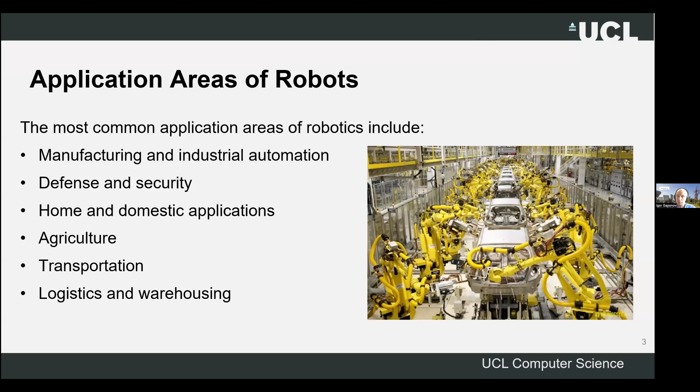Because industrial robots are such a huge and important player in everyday life, I just wanted to briefly show you the numbers. It's safe to say that by now there are almost 4 million units of robots installed worldwide. Just try to imagine how many engineers are required to service, repair, install, and reprogram them, say for every new part that robots need to be making.

Of course, the growth has been staggered somewhat by the recession in 2019, but then recovered quite quickly. In fact, since 2017, the number of units installed of industrial robots has been growing on average by 13%. This was further boosted by the pandemic, because people have seen a huge need and importance of unmanned technology - robots don't need to be quarantined, and they can still keep producing goods in the factory setting. Despite the slowdown in the economy in 2022, this did not actually affect robot installations.

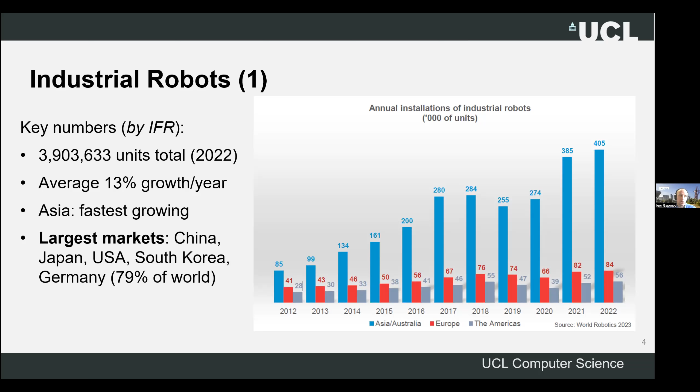And if anything, the demand is still higher than it was pre-COVID. And Asia is the fastest growing market in the world. But in fact, almost 80% of all industrial robots are installed across just 5 countries, which are China, Japan, USA, South Korea, and Germany. And most important applications of industrial robots include manufacturing of electrical and electronic parts, and of course, car assembly. So these two jointly share the lead in terms of applications.

But also robots are used in a variety of other applications, including food, and that includes both manufacturing and packaging. And it's fair to say that many things that we use in everyday life have been either manufactured or somehow assisted by robots to some extent. And sooner probably the percentage of these goods will increase.

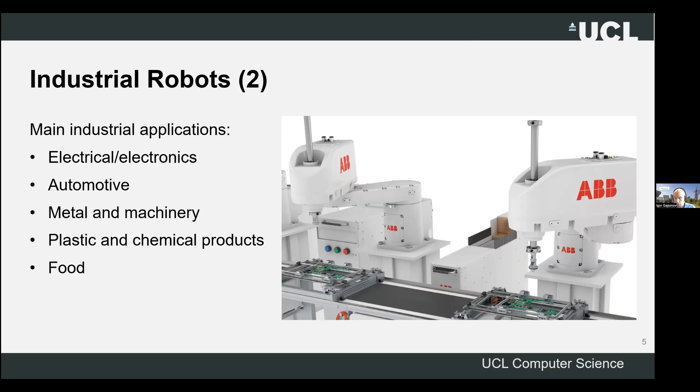But another fear that many people have is that because robots are used wider and wider, they will be displacing human workers, and that can obviously lead to various societal and economic crises. But in fact, studies show that that is not the case. The fact is that actually it's labor shortage that is apparent in many countries, and that's especially true for small and mid-sized enterprises. In the European Union alone, almost 3/4 of the companies report that they are short of skilled workers.

And that's where robots come in. Actually, many young people who enter the job market prefer to work in a company that uses what we can dub the technology of the future. And of course, robots and AI, artificial intelligence, are big players in that market. So the image of the company is very, very important.

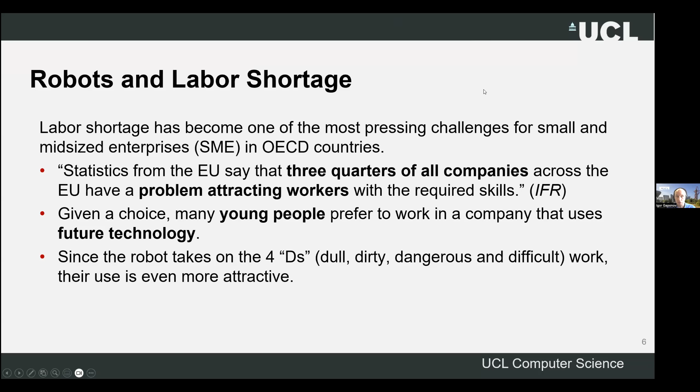Also, robots are most often used to perform one of those 4D works, such as dull, dirty, dangerous, and difficult. And of course, people who find themselves working alongside robots have more opportunities for professional development, for growth. And in fact, there is a bunch of evidence that automation does not lead to job substitution.

So we do not close workspaces for people. Instead, we reallocate people, and often people who were performing routine or dangerous tasks are now moved into the higher skilled labor sector, where, for example, they find themselves being complementary, being essential for the manufacturing process, because now they'll be programming robots. This is something that's commonplace in many factories, where workers who used to be just manual laborers in the past, or engineers for the automation line, now will be moved into servicing and programming robots.

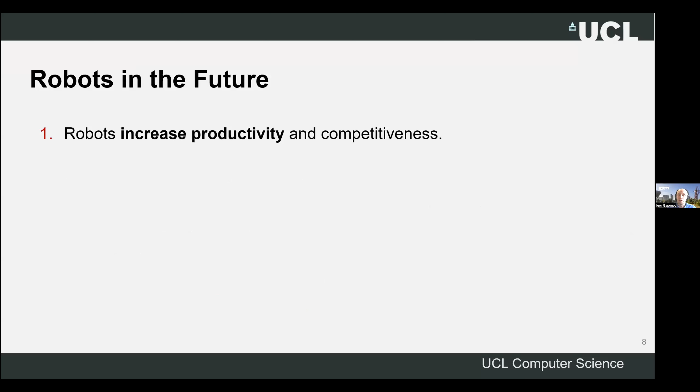This works because robots increase productivity, obviously, and the competitiveness of factories and firms, the companies that use them. That in turn leads to increased demand because now robots can produce more quality and probably cheaper goods. And that obviously creates new job opportunities because of the growing manufacturing output.

And now it's not just that robots are entering big industries and big factories. The future is robots and people working together. And that also includes small enterprises. For example, there are now several robots which are safe to be used around humans, called cobots. They can be installed, say, in a garage to help a small manufacturing facility, and in applications which were inaccessible for robots before. So there are actually many new use cases of robots which appear every day.

These lead to many governments and companies focusing on providing the right environment, the right skills to nurture the current and future workers. And of course, that has already led many governments and universities to create, sponsor, and try to develop these fertile environments for people to learn the skills in robotics and AI. That includes, of course, many universities such as UCL opening respective educational programs which focus on robotics and AI. And undoubtedly, this is one of the most promising areas of the future in engineering.

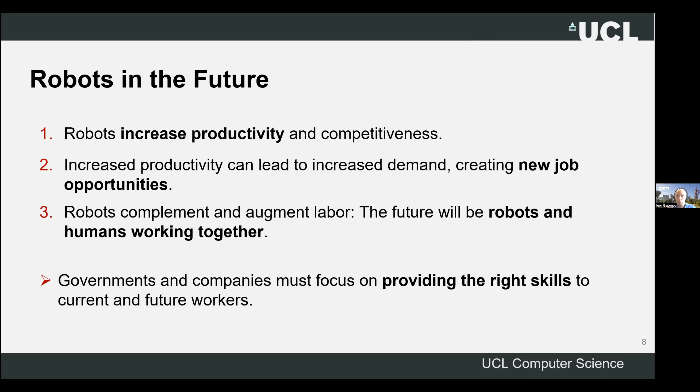And now that we've seen the impact of industrial robots, I would like to shift a little bit to probably a lesser known area of robots. These are called service robots. So essentially, this is everything that does not participate directly in the manufacturing process in the factory setting.

And there are many applications. So there are robots for transportation and logistics, including warehouses. And many of the robots in the transportation category include, for example, food and beverage delivery in restaurants. So if some of you have seen those, these fall into that category, transportation and logistics. Then there are many robots that are used in hospitality now.

For example, these are robots for mobile guidance, information, and telepresence, and they're used in a variety of public venues, including museums, airports, public fairs, exhibitions, and such.

Then there are many medical robots. For example, last year alone there were almost 5,000 surgery robots, very similar to the one you're seeing in the picture, sold worldwide.

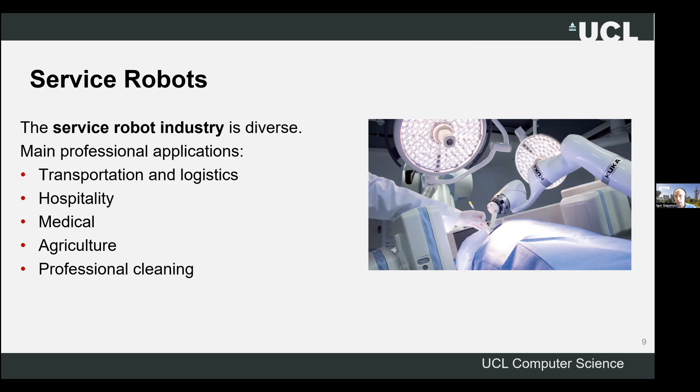Then agriculture robots, as I mentioned before, which include everything from growing and harvesting crops to milking robots, and robots for cleaning. Professional cleaning, especially floor cleaning, is a big category. This is very important due to the shortage of labor, and these robots work perfectly in areas with large floor space, like airports.

But also, there are many robots for consumer use. For example, over 5 million were sold last year alone, mainly domestic household robots such as vacuum cleaners, and some of you may have one at home.

But also gardening robots, for example robotic lawn mowers. There are more than 1 million devices sold last year alone, and these numbers are growing continuously. If anything, we will see an explosion of robots like this in the future.

And it's needless to say that for drones, an area of robotics that was used very sparingly 20 years ago, even 10 years ago, now they find themselves being used by many households worldwide. Many experts think that the next area that can explode is the exoskeleton area.

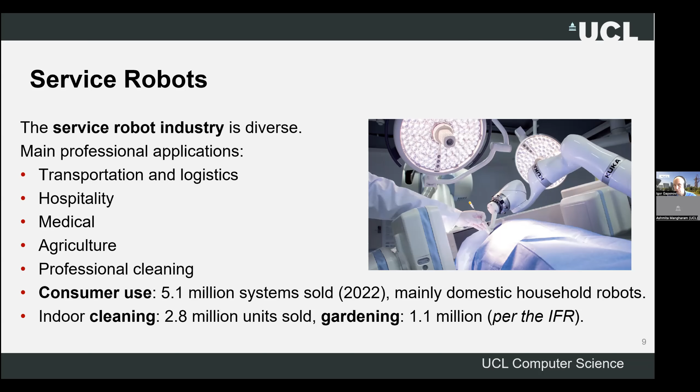For example, if laborers' work involves supporting a weight over their head, an exoskeleton can take or lift some of the load from them so they're not as fatigued as before. These robots are finding greater and greater use in many applications, including industrial and medical. I'm going to give a couple of examples of how they're used more extensively these days.

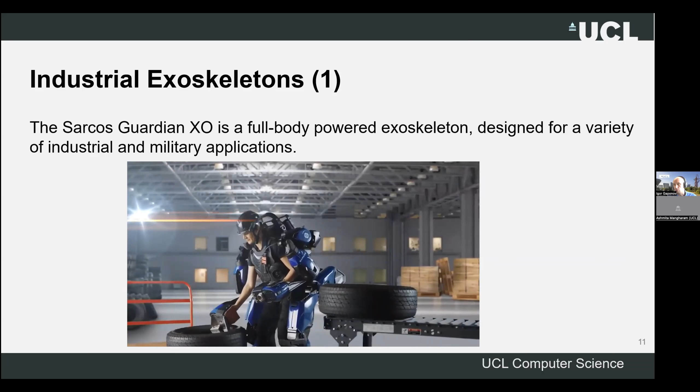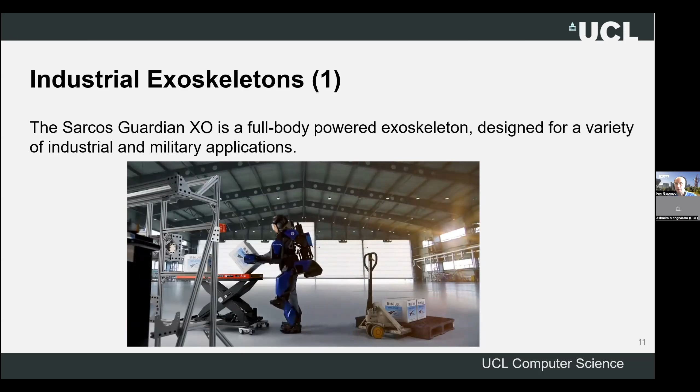The robot you've seen on the previous slide can be used to lift heavy loads. This is obviously useful in a variety of daily living and professional tasks, including helping warehouse workers, those involved in goods delivery such as loading or unloading trucks, groceries delivery to our doorsteps, and workers who lift bags at airports. Robots like this have been tested extensively over the past decade, and they're now permeating the consumer market.

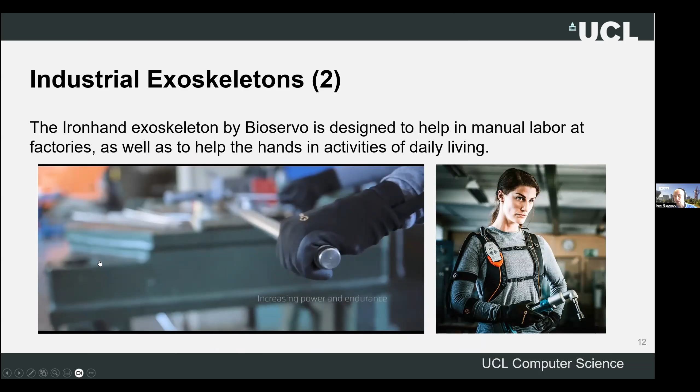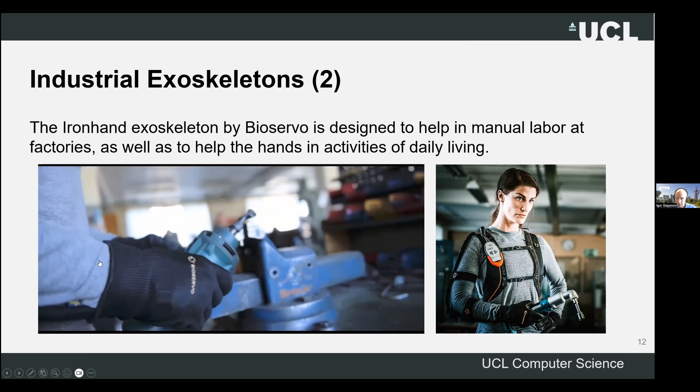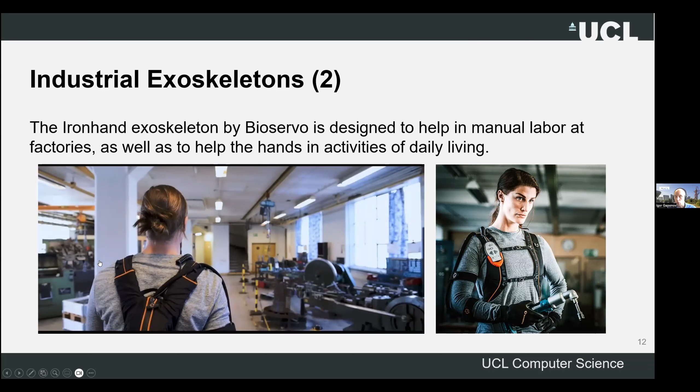Another type of industrial exoskeleton is wearable, soft systems which augment certain body functions. For example, there's a device called Ironhand, which helps manual laborers in tasks such as gripping, cutting, and holding, since this is obviously very tiring work. Using robots like this in industry not only helps boost productivity but also significantly decreases the risk of injury sustained by workers. Robots like this are finding wider and wider use in various industrial settings these days.

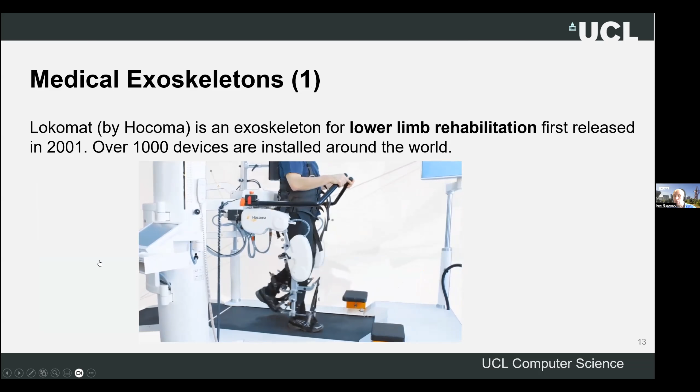But of course, apart from industry, there is a big demand for medical systems, because humans sustain injuries that may prevent them from performing activities of daily living. One common disease is stroke, and many people affected by stroke, depending on severity, find it very difficult to restore normal gait or walking. In traditional rehabilitation, it takes 2 or 3 nurses, as you've seen in the beginning of the video, to help people restore their functions, and simply we don't have enough nurses, doctors, and medical specialists for each patient.

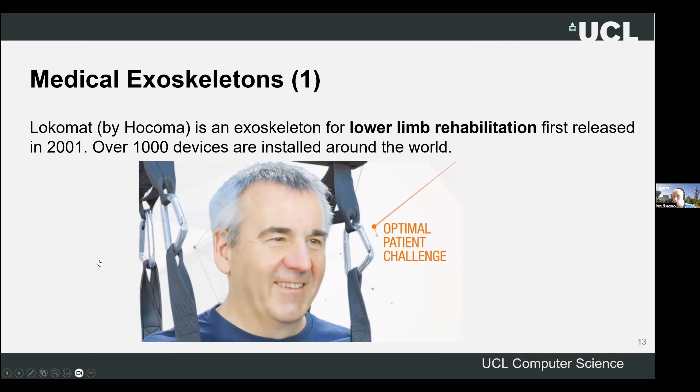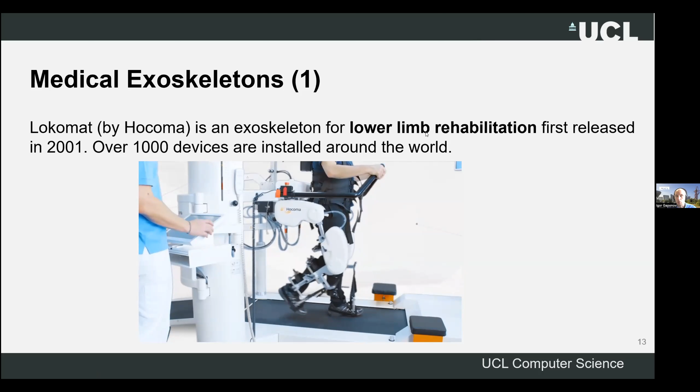So devices like the Lokomat here are becoming more and more common, and today there have been over 1,000 devices installed at various hospitals around the world. But of course, this device can only be used statically in a hospital. But what about those people who need a device like this at home? Indeed, there are many advances in this area as well.

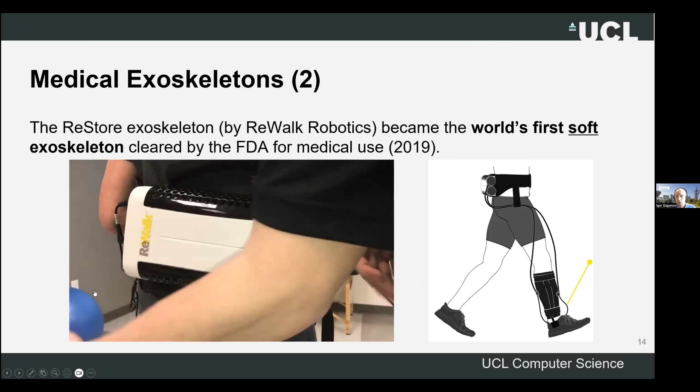For example, the ReStore exoskeleton by ReWalk Robotics was the first soft exoskeleton, which does not feature any rigid links around the human body, to be licensed by the FDA, the Food and Drug Administration, in 2019 for medical use. As you can see, the system is quite compact, and essentially what it does is help the lower limb, when affected by stroke, during walking.

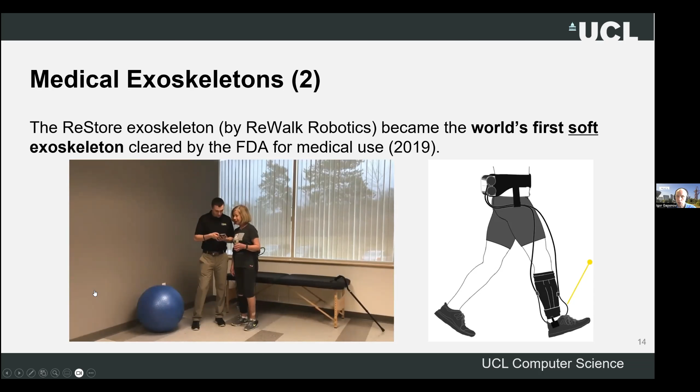Instead of using this for rehabilitation only in the hospital setting, you can wear this device either underneath or on top of your clothing. And this device can help you walk, which is again a very big advance in technology, and is extremely useful for many people out there.

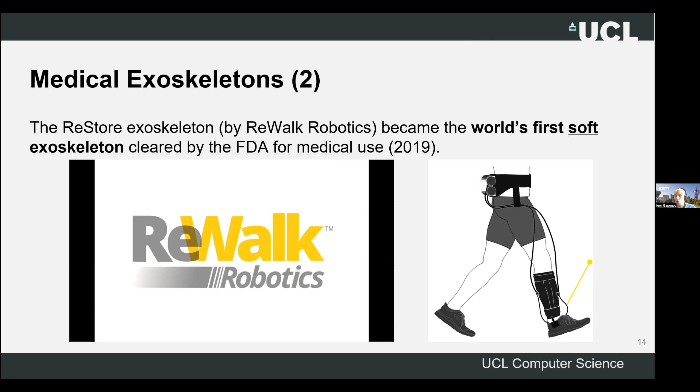So these two robots are for rehabilitation and assistance, but sometimes there is no rehabilitation that can help people. For example, spinal cord injury is a very severe injury. It can be sustained by those who, say, get into a car accident. And in this case, if you have an injury to your spinal cord, you cannot restore the functioning of your legs. And you end up in need of a certain device which will help you navigate and go out there in the environment.

Very commonly, this is a wheelchair. But again, there are many disadvantages to using a wheelchair, including accessibility. Too many places, unfortunately, are still inaccessible to wheelchair users. And that is why, instead of a wheelchair, there is an opportunity to use a medical exoskeleton.

For example, this is the device called ReWalk, by the same company as you've seen on the previous slide. It was licensed for in-hospital use over a decade ago, but also it can be used by persons at home. So you can acquire this as a commercial device and wear it to navigate either within or outside your house.

And also, which is very important, it supports both sitting down and standing up movement, something that many disabled people have difficulties with, of course.

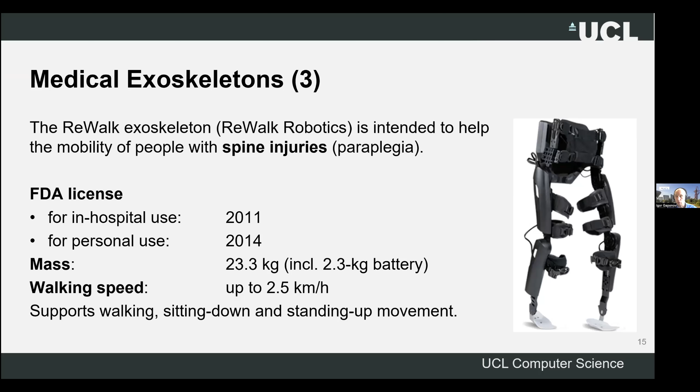And so these systems have been around us for over a decade now, and there is more and more development of such systems. And in big part, this is helped by competitions like the Cybathlon. Essentially, this is similar to the Olympic Games, and it also has different categories. This is, for example, a snapshot of the exoskeleton category.

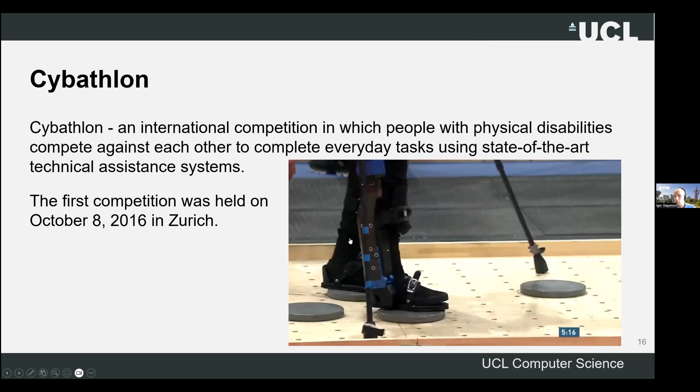Essentially, this is a race. There is a course, a track, in which the wearers of the exoskeletons, all people with disabilities, have to complete the tasks they face most commonly in everyday life. For example, sitting down and standing up, navigating, stepping on certain areas, then climbing stairs and descending.

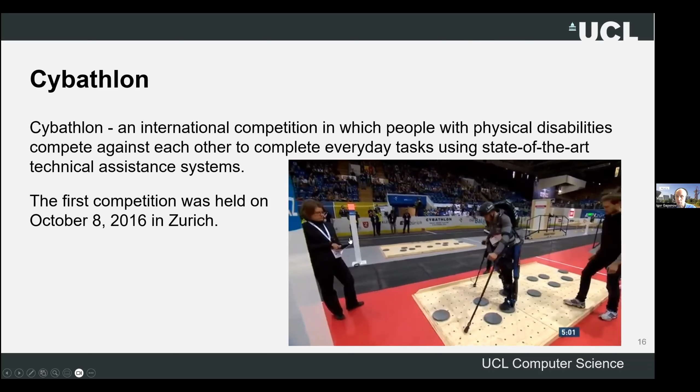And the best scientific research laboratories, as well as industrial manufacturers, compete in these prestigious events with their exoskeletons and the athletes who wear them. Events like this help boost the technology and development of various robotic and AI technologies across the sector. There was another competition in 2020, and there will be more. This was a hugely successful competition which helped showcase how important robotics and AI are for modern society.

And of course, hand in hand with robots, there is artificial intelligence. Many of you are aware that AI is superior to humans in its data processing and pattern recognition capabilities. And most modern robotics applications will be using or leveraging artificial intelligence to a certain extent, be it autonomous vehicles, like autonomous taxis and cars. They perceive the environment, make decisions in real time, and navigate changing unstructured environments, which is a big, important, and hard task.

Then space exploration, of course, it's a hazardous application, and robots are often sent where humans cannot go. That includes both places on Earth and outside it. Moon rovers and Mars rovers are just a couple examples of such systems, and they perform autonomous navigation and analyze data. And manufacturing, of course, for quality control, and many other applications for decision-making and logistics in warehouses.